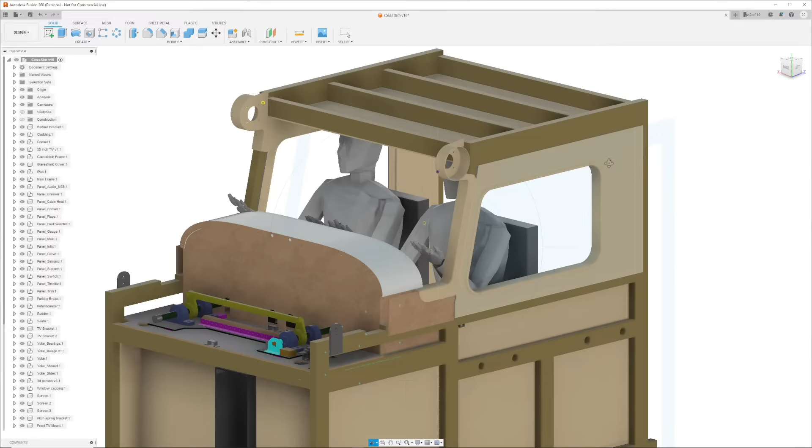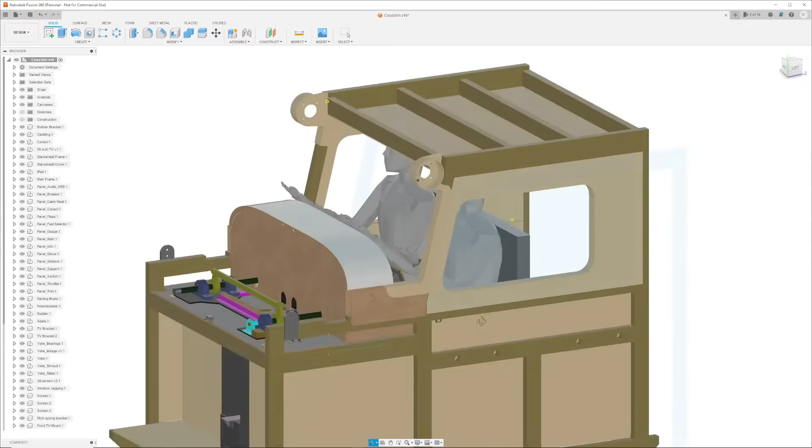I think firstly what we'll do is strip off all the other bits of the model, and I'll come back to you in a moment once I've stripped this all down. You can see that's the completed side there; we'll work on this side over here. Let me just strip everything off and come back to you.

Okay, here we are now with everything stripped off, and I've just got the two MDF sandwich panels, if you like, which would straddle the timber frame, and we need to create a capping material, or a cap, that follows that profile all the way around.

So part two of this is to draw a section of what that capping is going to look like. You can be as creative as you like with this. To do that, I need to create a sketch plane, and I like to create one that, if I took a right view, kind of cuts through there, because it's on the horizontal. It doesn't really matter where it is, as long as it's on the horizontal.

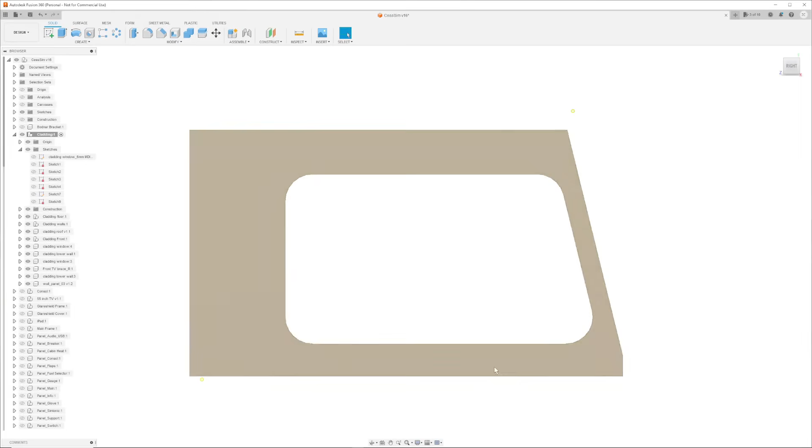So we'll scroll ourselves back, and the way I'll create a sketch plane through there is I'll take an offset from this back one, from here or here — it doesn't really matter — but I'll take an offset plane all the way through, and you'll see what that looks like. Let's do that now.

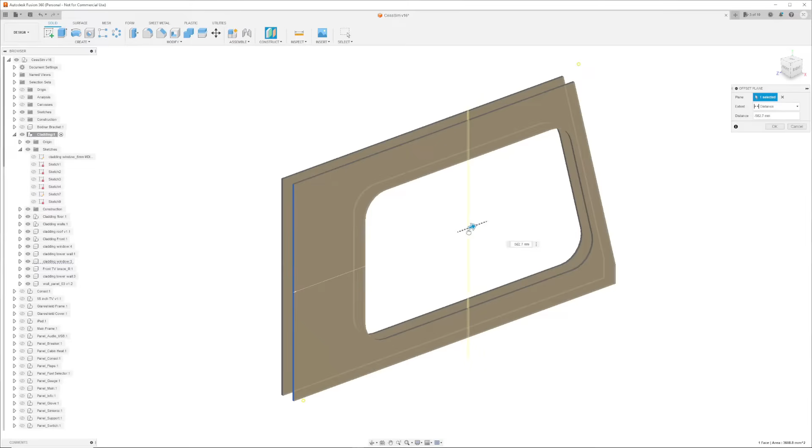I'm going to construct an offset plane. I'm going to pick the plane I want to offset, which is this one, and offset it in that direction. You can see where it's intersecting there — it doesn't really matter where it is, as long as it's somewhere in the middle there or wherever — and we'll OK that. And there it is.

That's the plane, and that's the plane we're going to create our sketch from. Now we go up to here, create a sketch, pick that plane, and it's now oriented around. It looks a bit confusing because it's literally just taken that, but one of the benefits of Fusion is you can actually slice through exactly where we were.

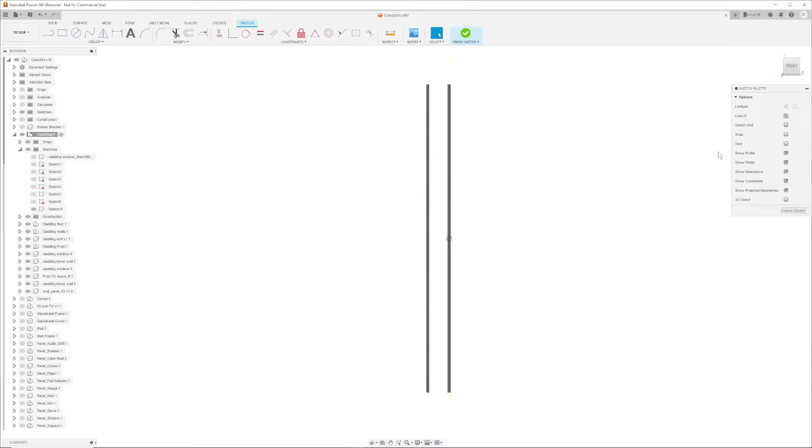If you see this on the sketch palette, see slice — click that. Now you can see the section. It's taken a sectional view through where we just sliced, and we want to create our cap on this bottom piece. So let's zoom in on this now, and let's start sketching.

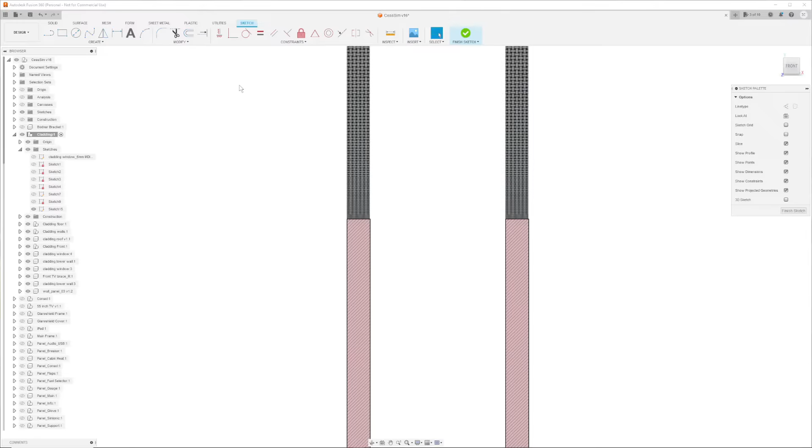You can be pretty crude with the sketch — you don't have to be dimensionally correct because you're going to do that next. Let's just knock up a very rough little sketch here, and we'll go up, across, down. This is all Fusion stuff, if you like; you can be as creative as you want. I'm just going to do that. Okay, you get the idea.

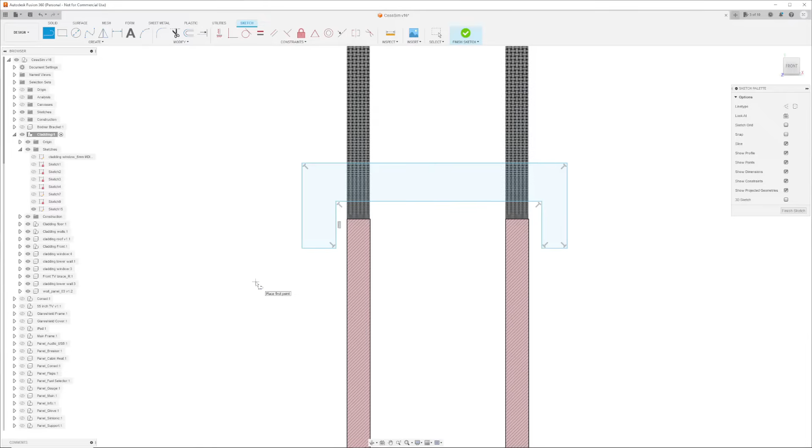Now that's the rough shape, but now we need to make that look dimensionally correct. So we've done our rough shape; let's give this some dimensions.

Firstly, let's get a dimension to make sure that this inside edge of this thing is sitting off of the bottom. From memory I had this at about a 0.5 millimeter clearance here, 0.5 millimeter clearance here, and a 0.5 millimeter here. Play with that yourself, but that's what worked for me from memory.

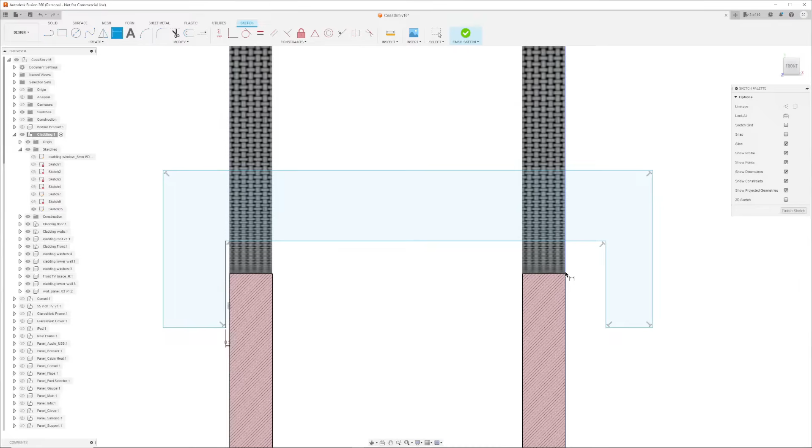So I'm going to make sure that between there and there is 0.5, which is what it is. It does that automatic zoom, so just zoom back in again, okay? And do the same thing over here — I want to go from here to here, and that needs to be 0.5, okay?

And then I also want to make sure from here to here is 0.5, and from here to here is also 0.5. You can see that's done, so that's beautiful.

Now we want to give this some thickness, so let's make this 3mm thick. So here we want that to be 3mm. Do the same over here, make that 3mm, and we want this also to be 3mm. So we go from here to here, that's 3mm. Okay, and there's a 3mm thick cap.

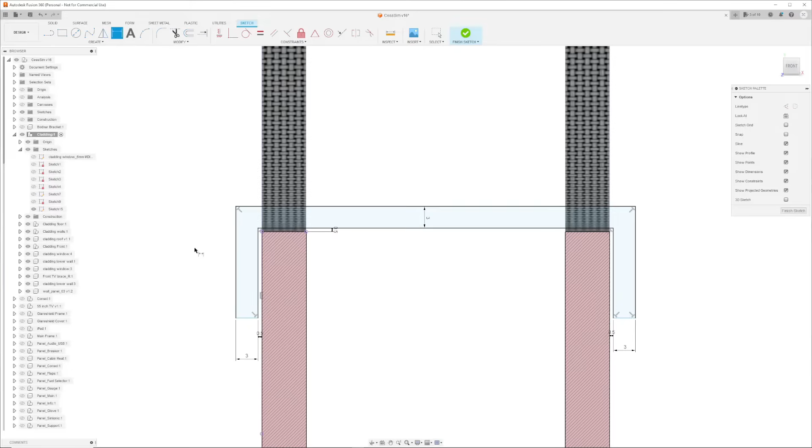Now, what distance does that want to look like? Again, this is up to you to look at yourself in terms of your own profile. But for the sake of this exercise, let's have a look. It's currently 15.4, I'll make it 15. Enter that there, and we'll do the same over here just to make sure that is exactly 15, and it is. So now that's it.

So there's our sketch done. Now we need to look at moving on to the next part, which is to profile that so it actually follows the inside profile, if you like, of our cutout. Let's go there now, and I'll show you how to do that.

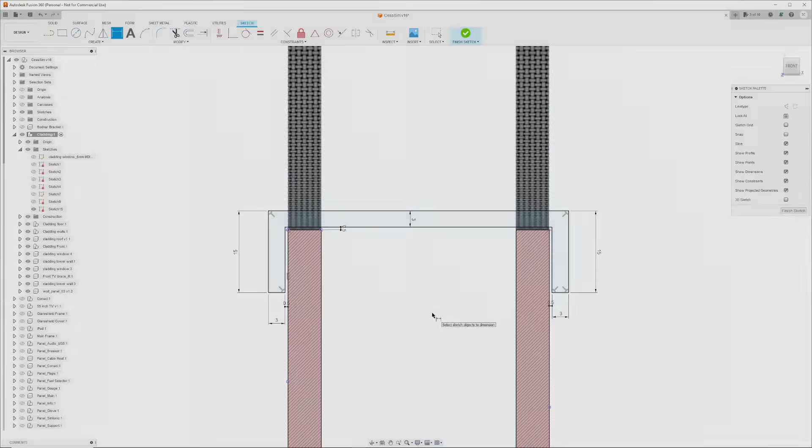Fusion 360, when you get the hang of it, is a really powerful program. I'm no way, shape an expert here, but once you get into it, it is really, really good. So, here's an example of why.

What I want to do now is automatically get that shape traced around the inside of this, and I already know this is the profile I want. I want this line all the way around here. But watch what we can do here.

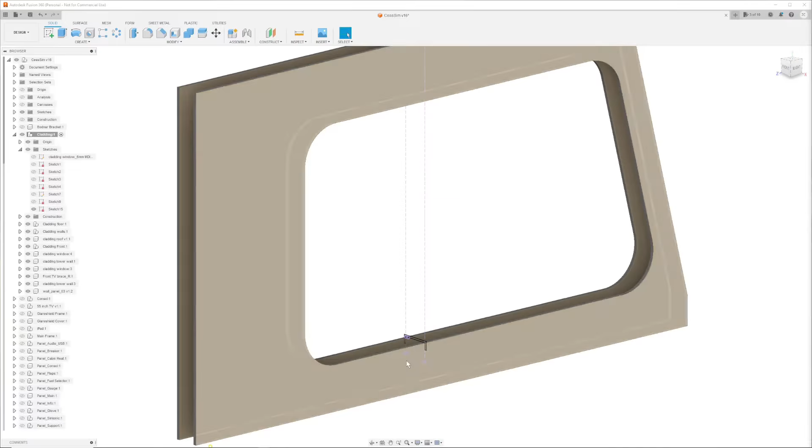So now that we've done that together, all we need to do is highlight our sketch. By basically hovering your cursor inside of it, you can see that. We click that with the left button. We come up to create, and we're going to go and see the sweep.

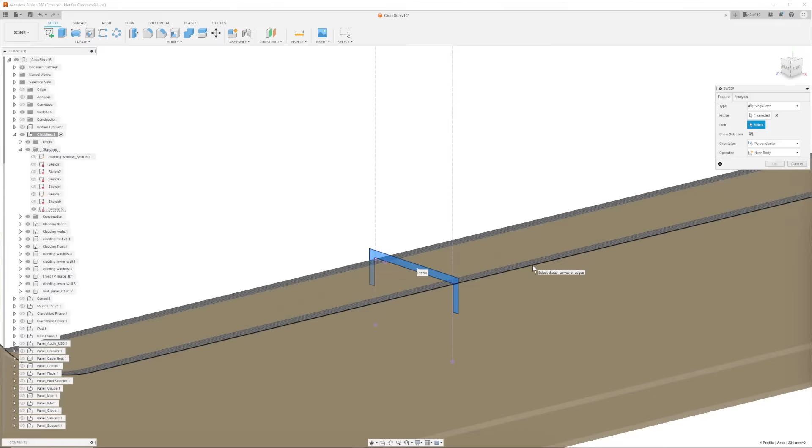What we're going to do is select a path here. That path is going to be the outside line. See that there? As soon as I do that, we make sure before we do that we create a new body, which is what that is, okay? And it's going to be perpendicular. Let's leave that where it is. Go to here, click that, and then OK, bang.

Done. It's as simple as that. There it is, done.

Well, we say that, but there is, now that we've got that, and by the way, bear with me, this is a different material here. Obviously you can change that material, but just to show indicatively what that's going to look like. But now you've got it. So that's your capping done.

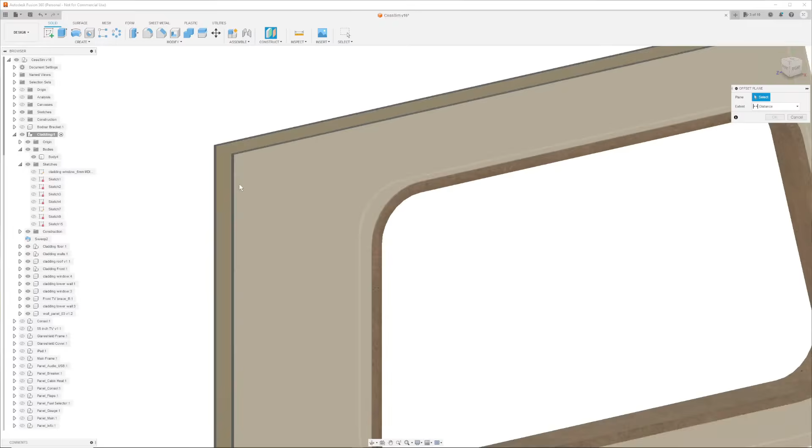And if I was to go and create a new sketch, you would see even at the top there, that should be that dimension in. So let's have a look at that. Let me just create a new offset plane just to see what that's going to look like. I'll come in from here, and I'll come across, let's go over to the edge towards that edge over there, and we'll OK that. And I'll just create a new sketch here just for the sake of this exercise.

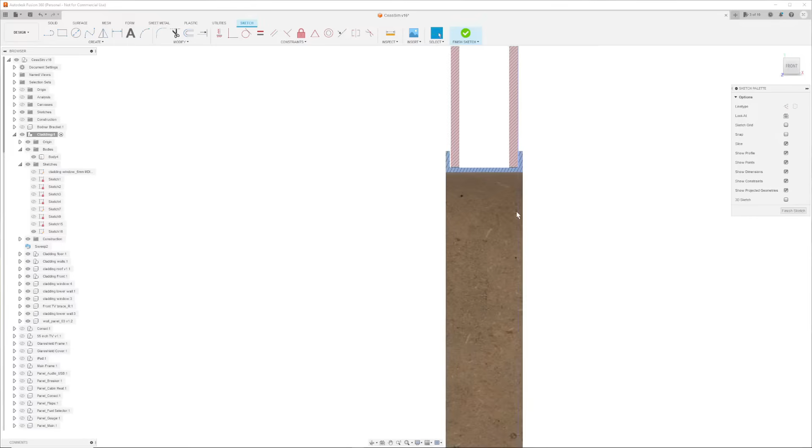I'm going to come in on that, and now I'm going to just hit slice, and there you see it. There it is. See? That's the cap at the top. As you can see, it's got half a mil there, and half a mil here, and no different at the bottom. So it's worked out perfectly. Okay? And we can delete that sketch, we don't need that one.

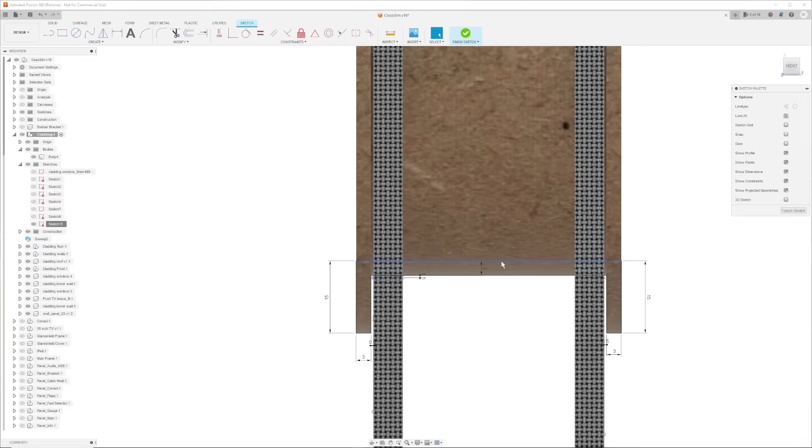So now we've got our profiled capping done. And you can pick whichever profile you like, you don't necessarily have to do a basic profile like that. If we go back to our original sketch that we had and edit that again, you could have this be a fancy little insert shape up here or whatever you like. You can do whatever you like with that, but I just made it a straightforward cap.

But it lacks a bit of detail, and before we move to the last bit, which is cutting all this up, we probably need to give this a bit of finessing, because it's got sharp corners at the moment. It's a purely sharp cornered piece. As you can see, these are all sharp edges. So let's get some filleting into this and do that now.

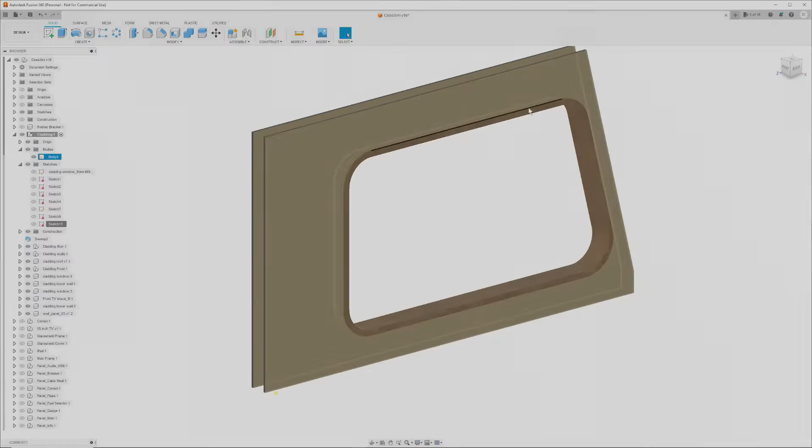Okay, just before we start the filleting, I thought I'd just change the appearance colour of that, just so it makes it look a little bit more presentable, so you can see what's going to happen here on the filleting side. So I've just changed the appearance colour of that in Fusion, which was fairly straightforward.

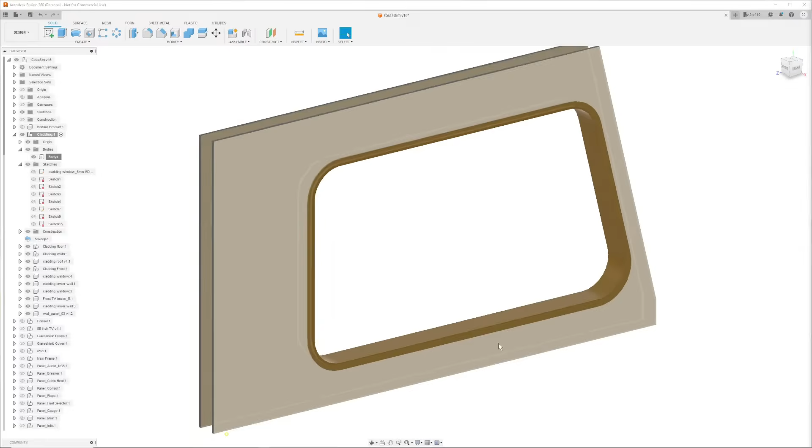So let's now dress these up to make them nicely profiled in. The first thing we're going to do is create a fillet on each of these two top edges. Simply go up to your modify tool, fillet, and pick that edge. As you drag that arrow in, you can see what's happening visually to the model, and it's up to you how big you want that to be. I'll go for a 2mm fillet on that one.

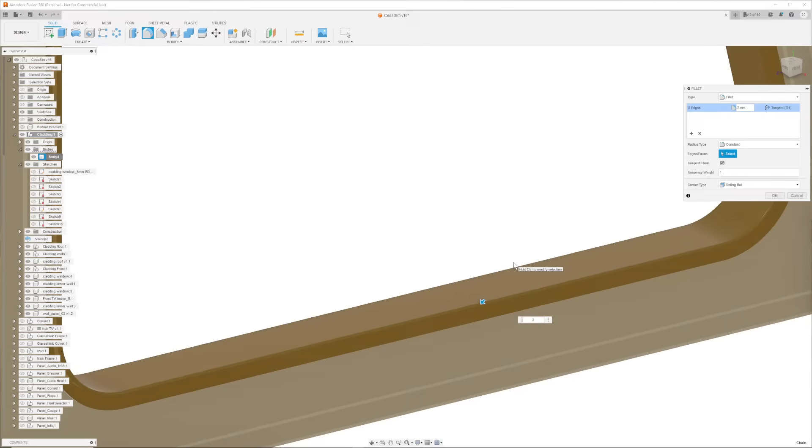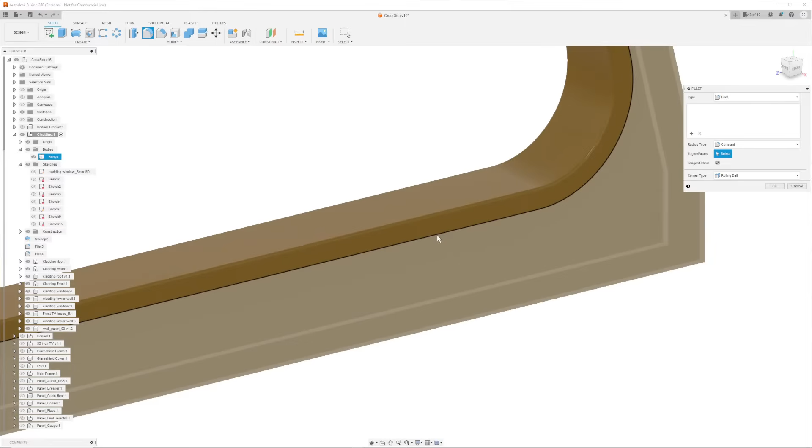Okay, and you can do whatever fillet size you like. Do the same thing on the other one - take that edge there and we'll make that a 2mm fillet as well. So that's the two edges there which you can see. Let's do another one on the bottom here as well, a 2mm fillet, just to round the edge up from the bottom. So 3 fillets now been created.

So we've now got some roundness to this. I'll just check that to see if it does look like that. So again, I wouldn't mind just doing a section profile through here.

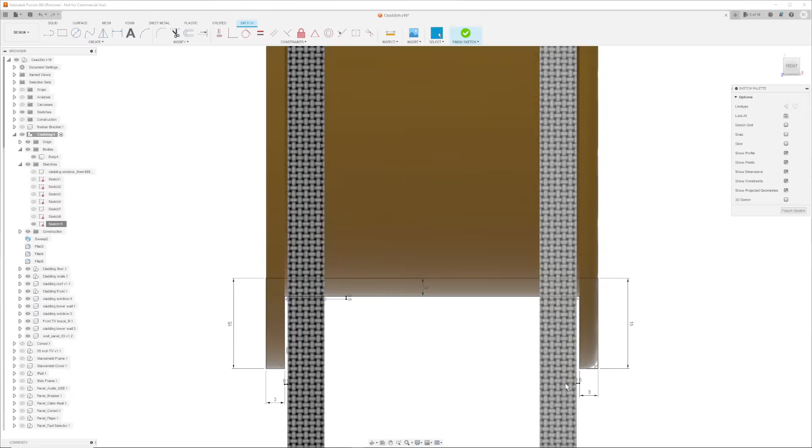I should be able to do that by picking up the previous sketch. And as you can see, what it's done is it seems to have picked up this, but I don't think it's picked up the rest of it. So let's just see what's happened here. Make sure that we've got everything, and I'm not sure we have. So it looks as though we may not have all of it. Let's just check to see if we have. You've got to do some checking on this.

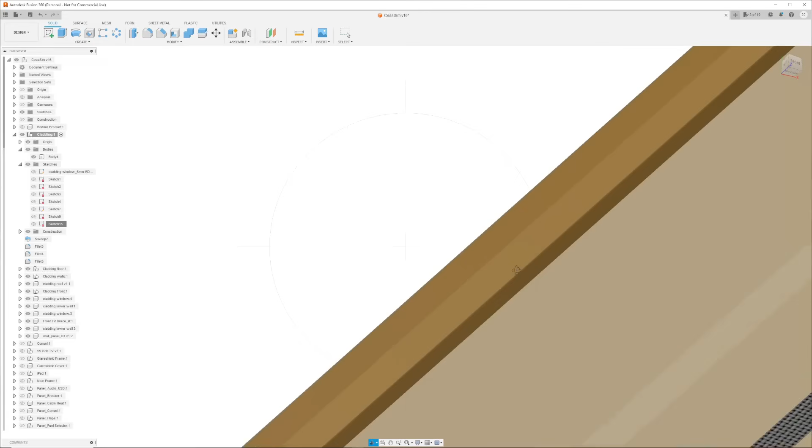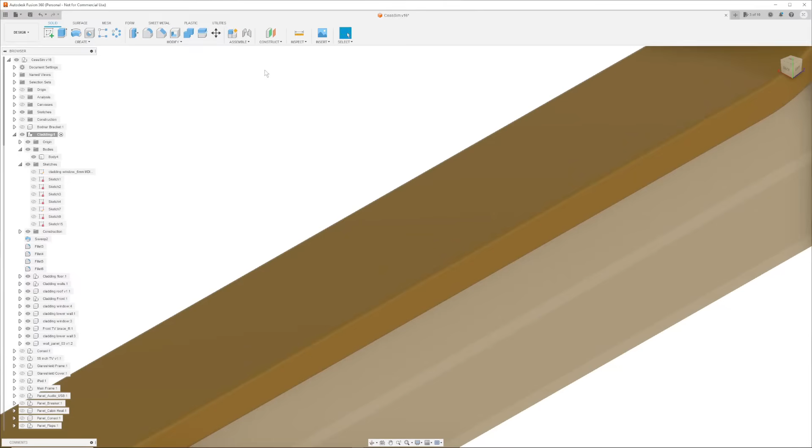I'm not sure we've got that, so let's just make sure we fillet that all as well, making sure we've got 2mm there. Now we've got that, and we've certainly got that one because I can see it going all the way around. Yep, and make sure we've got a 2mm fillet on the top here. Fillet that one. I think we've got that.

Yep, I think we've got it. So I'm pretty sure that's it. That looks like that's filleted all around there. So I think we've got that one. Okay, so we've done our filleting.

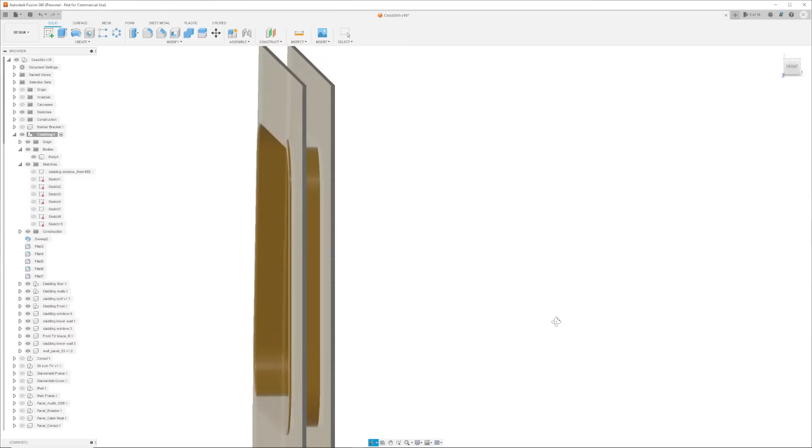Now we need to be able to do some slicing of this thing so that we can cut this up into pieces, which is the next phase - cutting this into logical pieces that you'll be able to print on your printer and then join them together. So let's go to the final part of this, which is to now slice this thing up into usable sections and go from there. Let's go there now.

Okay, splitting this body up - effectively this is one body at the moment, so obviously we need to get this into parts that we can print from. That's up to yourself how you want to do that, but the way that I did it is I did each corner area as individual pieces, and then just broke these pieces up as you need them. So to do that, the way I've done it is I need to split this, and that's that split function there, split body.

So to do that, what I have done is I've created new sketch planes and used those sketch planes to split the body. So let me show you what I mean, and I'll focus in on the corners first because that's what I want to do. So I'm going to create a few sketch planes here, and we'll go from there. That's our capping sketch plane. So I'm going to create a few more offset sketch planes and we'll split this body up.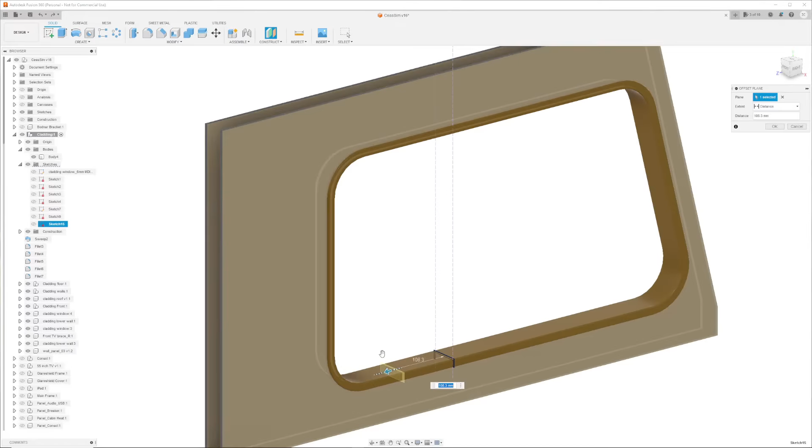So let's go to the first one and construct an offset plane from here, and we'll come in and probably place this. I want to do it on the corner, so I don't want it to be on the bevel - I want it to come out a bit, so it's actually on the straight. So I'll do it about there, and that'll be the same as up there, so that's fine. So I can rotate that one, and that'll be fine for that vertical cut. We'll OK that, and then I'll do another one which will be on the other side.

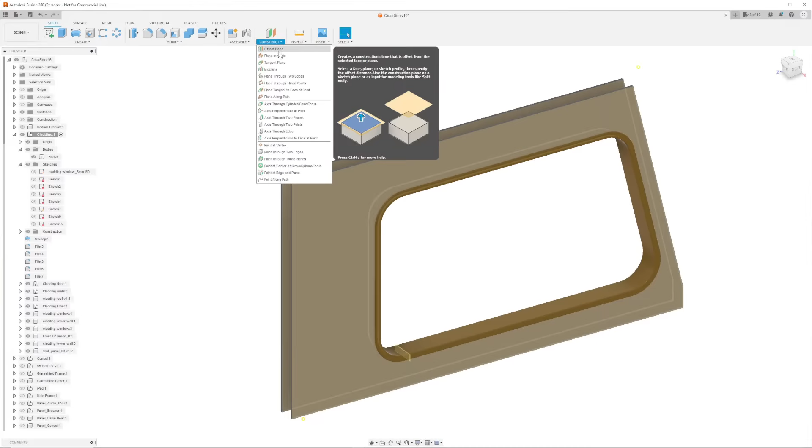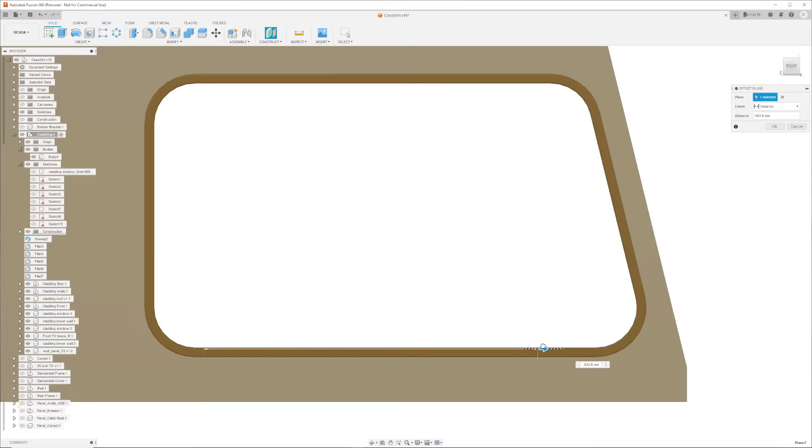So construct another offset plane - can probably come from this one actually, and we'll go over there. And let's just go to the right hand side now, and I'll pick another one, which I've just got to be mindful about that top bit there, because if I come into here that's going to intersect that. I also want to keep them the same. So I'll do one about here, which roughly looks about right. Okay, that one.

So that's the two verticals done, but now I need to go this way so I can cut this side of the corner. Same philosophy, just take it from this plane though. Construct an offset plane, come down from here, come down this way, and let me just get that dimension like that, and we'll take that down.

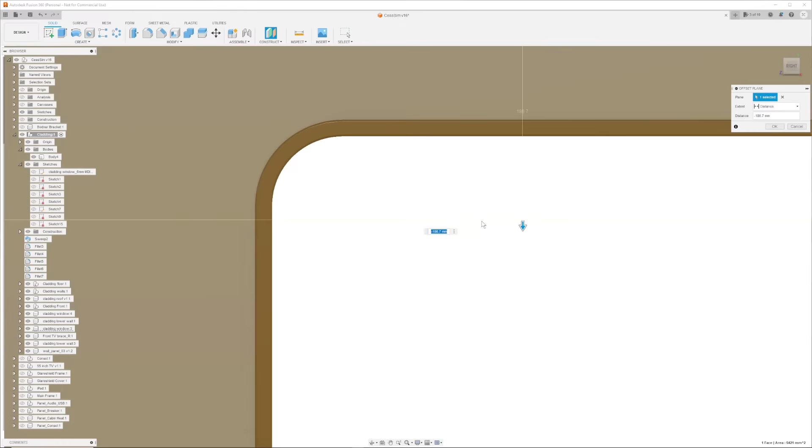See how we're going to go past the curve? So come past the curve, about there will do. Okay, that one. And we need to do one more down the bottom here. So we'll go and construct another offset plane. We'll take that one there, and we'll come down again, and we'll come above the curve. Doesn't have to be too scientific with it, and that looks like that fits there.

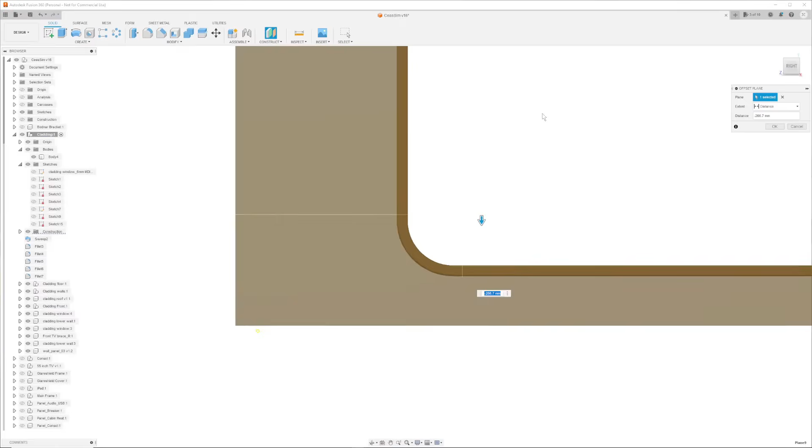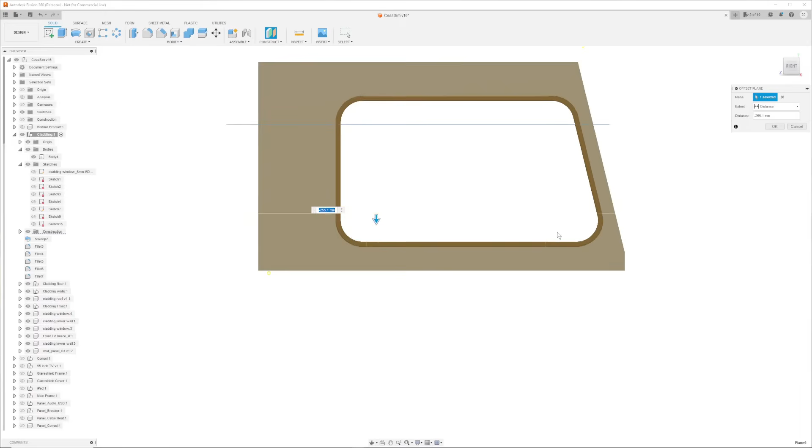See how it's picking this curve up? I need to go up a bit because it's still on the curvature there. So I'm going to pick that one up a bit there, and make sure that I'm not on the curve, which I'm not. I can probably come down a fraction, probably to there. That's pretty close. Okay, and okay that.

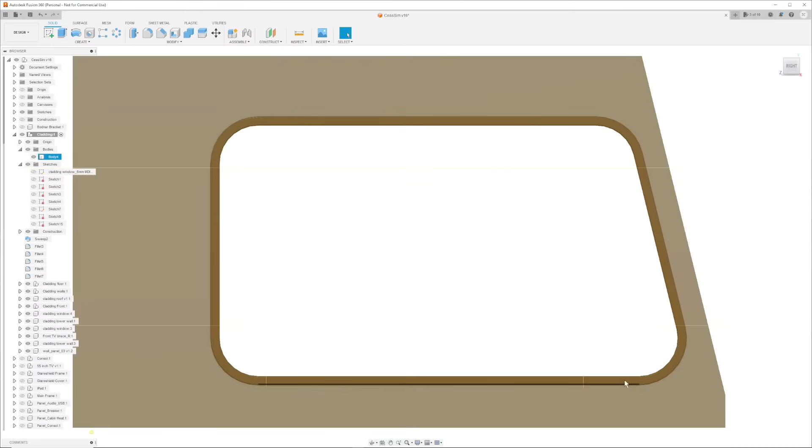So now you can, it's very hard to see, sorry I've got this on the yellow, but you can see I've got a sketch, you can see how I've got a cut line there, and a cut line there, and a cut line there, and a cut line there. I could probably do another cut line on this one if I wanted to, and I might just have a look at that in a moment.

So now that I've got those cut lines in, we're going to start to slice this thing up and split the body. We're going to split this up into bits. What I want to do is isolate the corners from the straights. Okay, so let's do that now.

Okay, let's start splitting this body up into its pieces. I think we could probably just hide this MDF for this, so we don't need to see this. So let's just find where the MDF is, and let's just hide this. I think it's in here by the look of it.

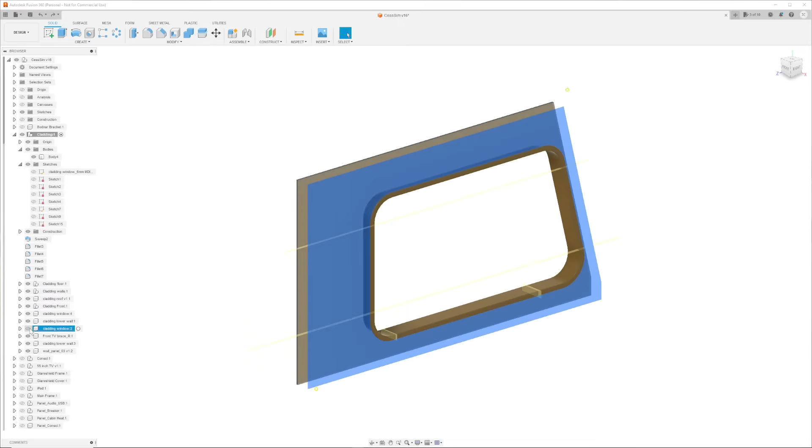Looks like it's there. Cladding, window, there it is there. So we'll just turn that one off and turn that one off. Okay, so now we've got that, and we've got our sketch cut points there. You can see the beautiful piece of single capping.

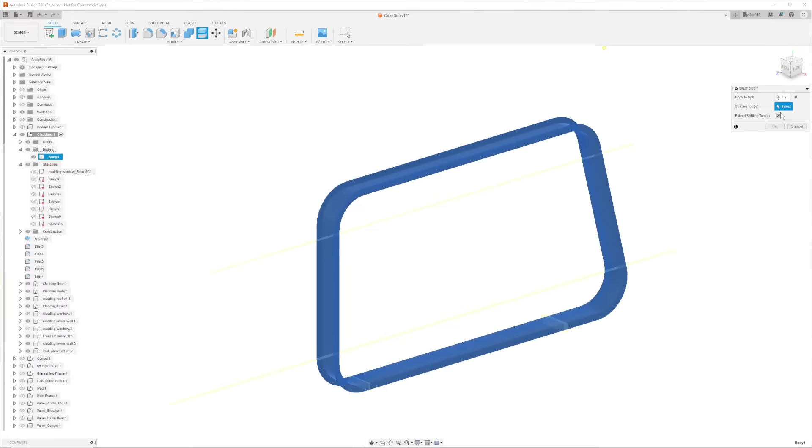So let's split this up now. Split the body. We're going to take that, we're going to pick the body, and at the moment it's obviously in just one body, as you can see. We're going to take that, and where do we want to split it? The splitting tools. We'll go through the horizontal ones first. So we'll split it there and there, and just okay that.

Now if you have a look over here, and if you highlight it, it's cut it. See what we've got? Body number 4 is now this bottom piece, one piece. Body number 5 is the top piece. Body number 6 is the side and the side, because we've actually just taken a slice through there and through there. But what we do need to do now is, this is still, that's not too bad, but that is one piece.

So we need to do our vertical cuts. Let's do the same exercise, but this time doing the vertical cuts. Okay, so again, let's go to split body and see if we can do the vertical cuts. Pick our body, which is there, and pick our cutting tool, and that doesn't seem to work.

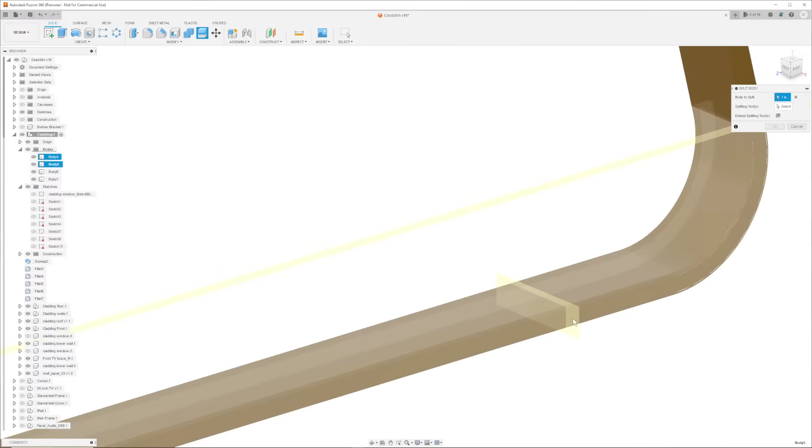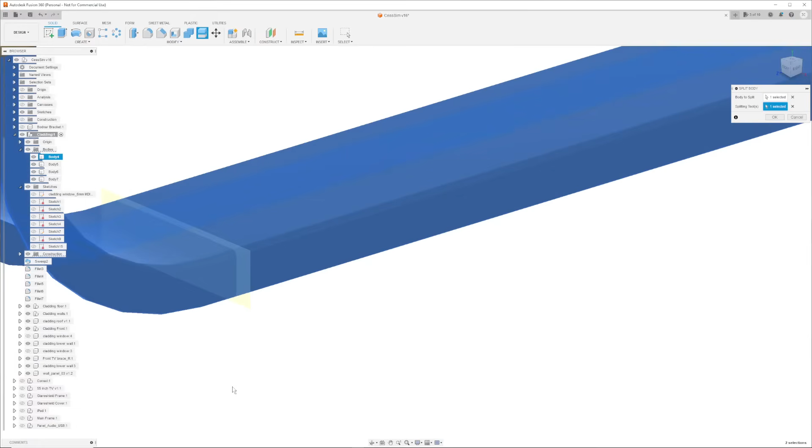So we may be able to cut the bottom one, but for some reason we may need to do another sketch plane for the top one. But let's just see how we go. So let's try the bottom one first, because that seems to go through there. So we'll see if that works. Split that. We're going to slice that, pick our splitting tool, which is going to be here and here, and okay.

Now that should have done that. There it is there. We've got the straight bit, we've got that corner, and I think we've also got, we don't have that corner over there.

There it is. That's okay, that's good. Now we've still got that top bit there though. Let's see if we can split that up at the top. Just try that again, and we'll go back to our split body - that's the body we wanted. Let's pick our splitting tools. Oh, it does work - sorry, I must have had the wrong one before.

And see, it hasn't worked. So we've got to pick the body and we're going to split that. There we go, that's better.

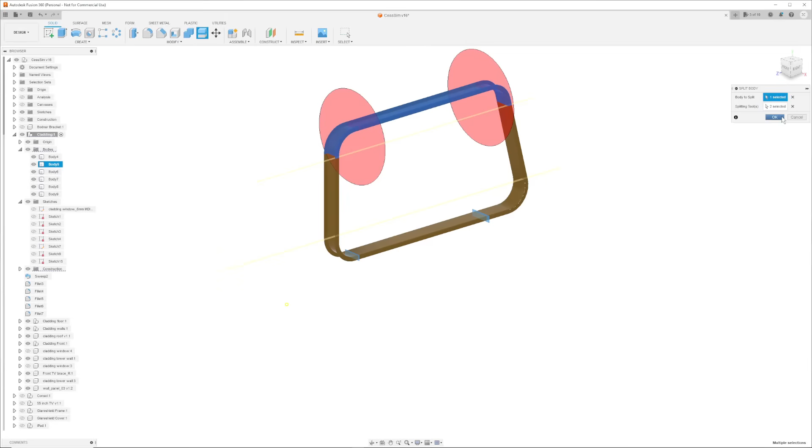Okay, now it's done it. Now if you have a look at all the bodies coming up: body number 4, you can see it's got that corner there. Body number 5's got that corner there. 6 is a straight, 7 is a straight, 8 is a straight, 9 is a corner, 10 is a straight, and 11 is that corner. So we've got the whole thing now split around.

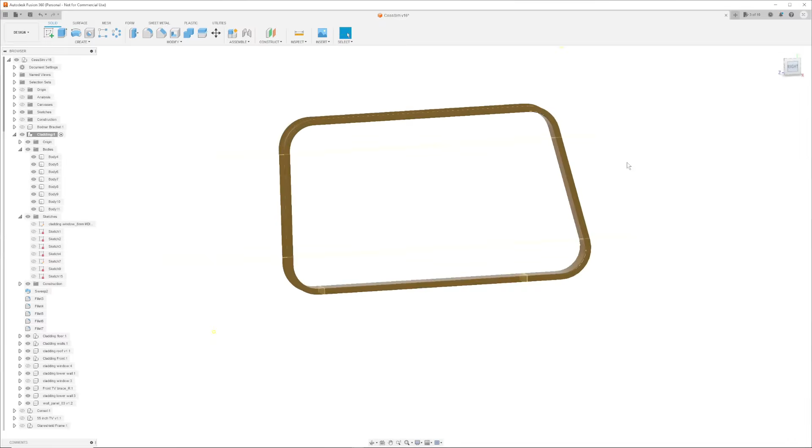But it's still not quite finished. I think what we can do now - well, practically, you know, these are perfect fits, and we know full well that won't be a perfect fit when you go to fit this thing up. You really need to introduce some gaps between each of these, and given your 3D printer's tolerances, I'd probably work on say half a mil gaps between each of those pieces to make sure it fits.

And that's just a simple case of taking the piece and extruding it back a little bit - a press pull back by half a mil - and seeing what that looks like. So let's go try that now.

Okay, so to do those pieces where you want to come back, it really doesn't matter where you start, but I typically would just focus on the straight pieces and pull those back rather than working on the corner pieces. You can do the corner pieces too, but if you keep the profile going, just leave it where it is. So I'd just focus on the straight pieces.

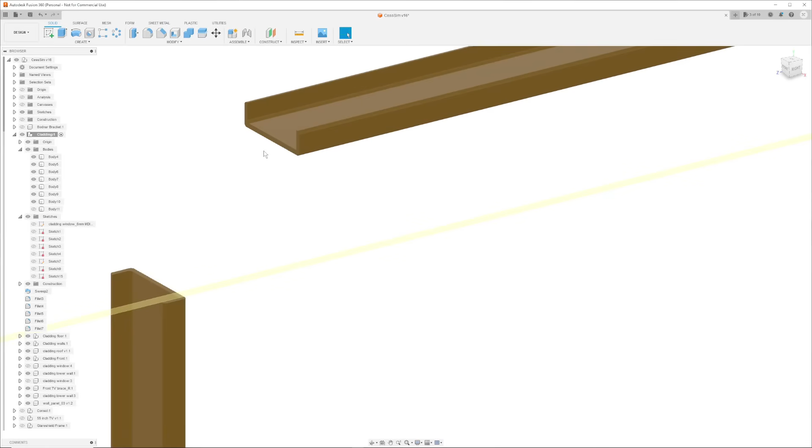So what I want to do is highlight one, and turn this one off just temporarily to highlight that. You can see now I've got this face exposed, which is beautiful, and it's a straight piece. So all I need to do is scroll into here, click on that edge, right click, press pull, and bring it back minus 0.5.

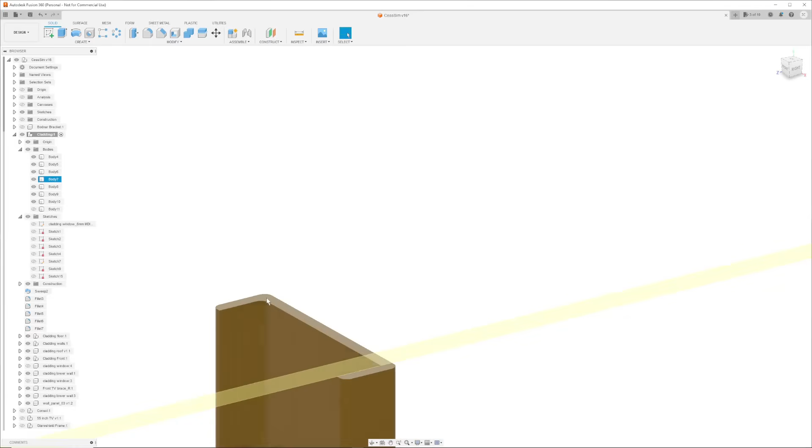Okay, and do the same thing with that one - highlight it, right click, press pull, and bring it down minus 0.5. And then okay that. Now if you turn back on that body, you'll see that you've now introduced a small little gap there - you see that? You've got that very small gap.

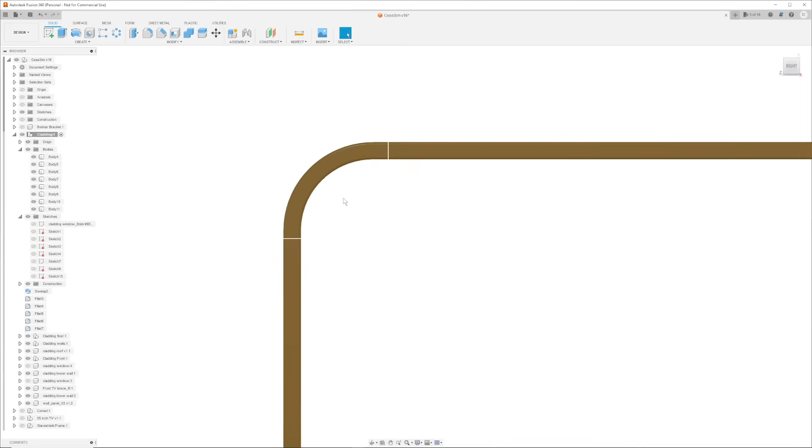Now you might try 0.25 - I can't remember exactly what mine was, but it is useful to have a gap there. So you need to take that, do that process, and follow it all the way around all of them. Do the same thing around all of them.

And the way that you'll do it, I'll show you once again. We'll take this one over here. If we hover over it, we know that that is body number 4. So let's turn off body number 4, visible there.

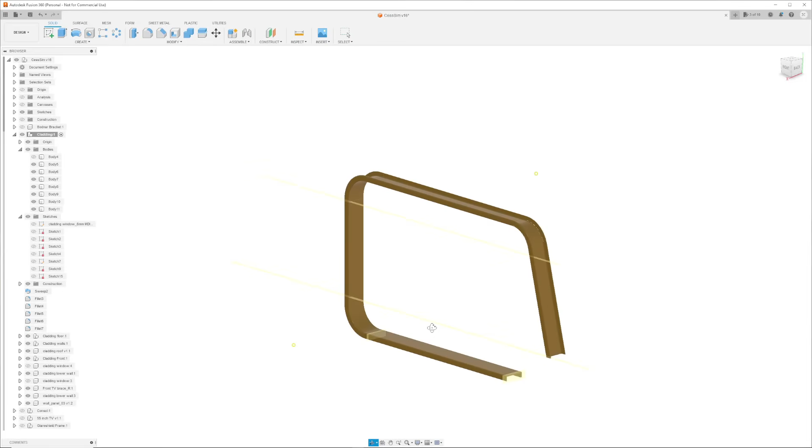Okay, and all we need to do now is come into the straight piece here, and we're going to press pull that back. We could probably turn this off, and we'll save that there, and press pull it back. So we'll highlight the face, right click, press pull, come back that way, minus 0.5.

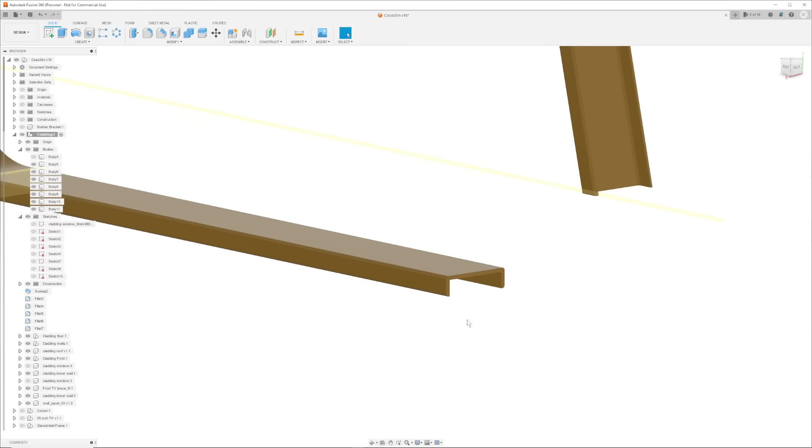Okay, and then do the same on this one up here. Scroll that up like that, and then take that face and press pull - you want to come up, move away from yourself, minus 0.5. The minus being it's cutting back into itself, and okay that.

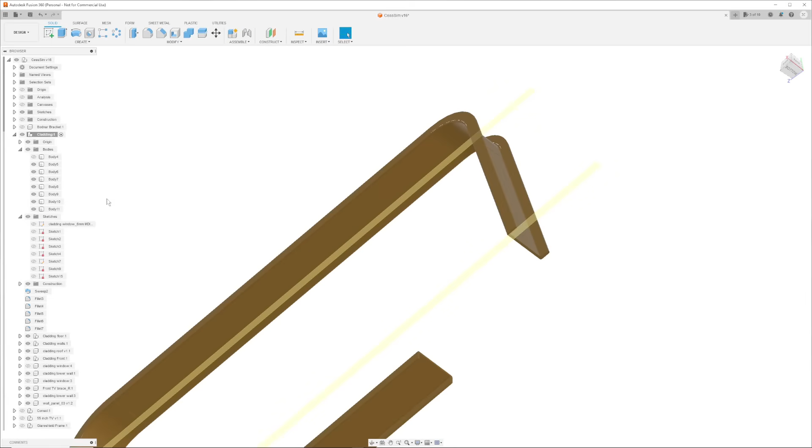Now if we go back over to where the bodies were, highlight body number 4 and turn it back on, you can see that now has a half mil clearance. Okay, so that's how you'll do that - do that for all of them. I'll do that now, and then I'll come back to you and we'll finish off showing how it looks.

Okay, so I've now created those little gaps at each of the corner points, as you can see there on the left, and as you can see all the way around. So from a 3D printing point of view, these would now basically be full bodies.

There's body number 11, let me just orbit that to show you. Number 11 on mine, yours could be any other number, or number 9, and so on. So they will all work.

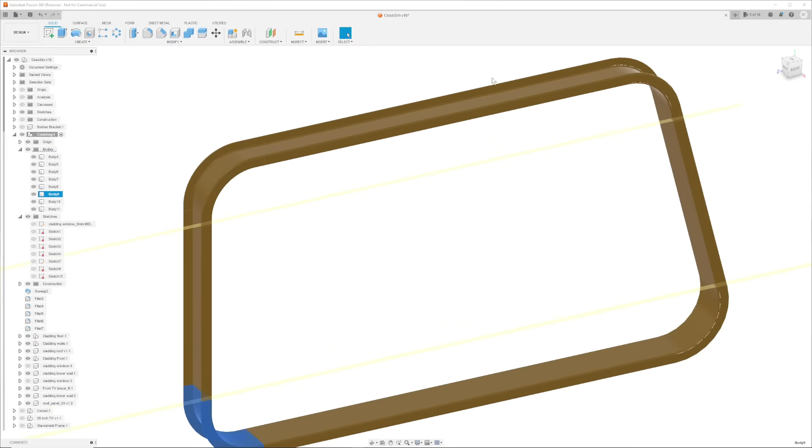But the bits that still require a bit more work - we could still further split these long straights, because at the moment that's going to be way too big as a single piece. So you need to split that up as well. You'll do it the same way as before, and it's entirely up to you depending on how long your bed is, and how you want to slice it.

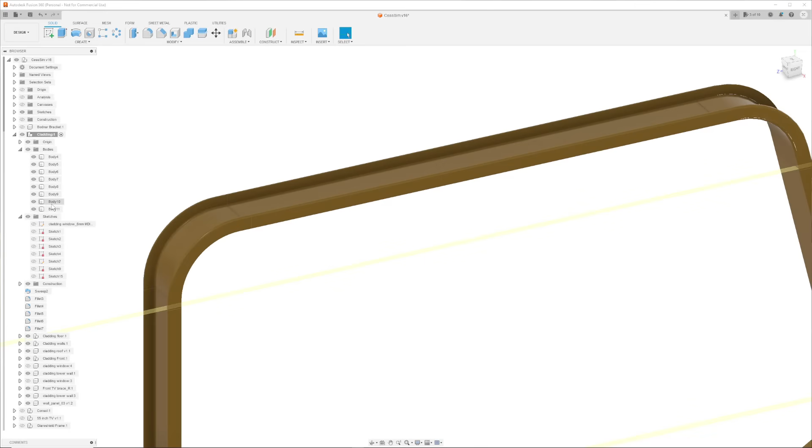I'm not going to go into each and every one of these, but let's have a look. My longest one is probably this one here, let's see how long that is from dimension to dimension. I'll turn these other two off so we get what that looks like. So this end to end is 502 millimeters long, okay, and that is way too long.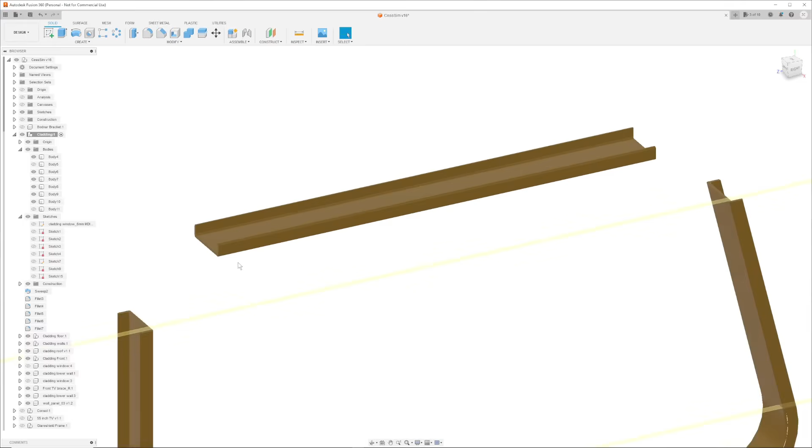So I need to split that down. Now that you've got that, I can create new split points and split that body down. To do that I can literally split that body, and we do that by basically creating our offset planes, once again just cutting through that.

So you will pick yourself how many planes you want to put through that. But let's say I want to make this into 3 pieces, or close enough. What did I have? I had 502, so we'll do 2 at say 150, and the last one at 300 - so 3 at 150, and then maybe 1 at 60. But you can do whatever you like.

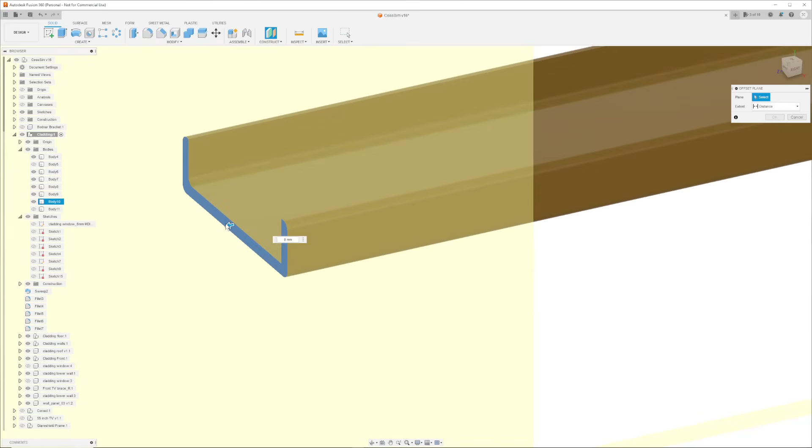So I'm going to construct an offset plane through here, come in that way, and go in at say 150. Whoops, minus 150, my mistake, other way. And okay that, now I can split that one up.

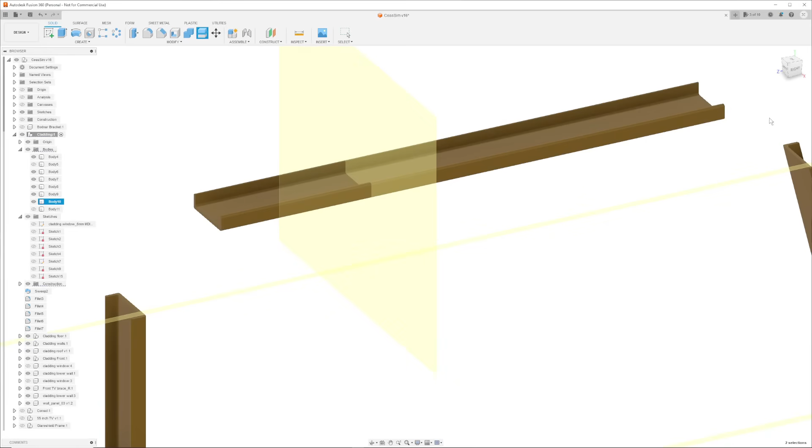Same thing again - you go into your split body, take the body, and take your splitting tool, which is the plane you just created, hit that, and go OK. Then you can hide that plane using show/hide, and now you've got a split there and there.

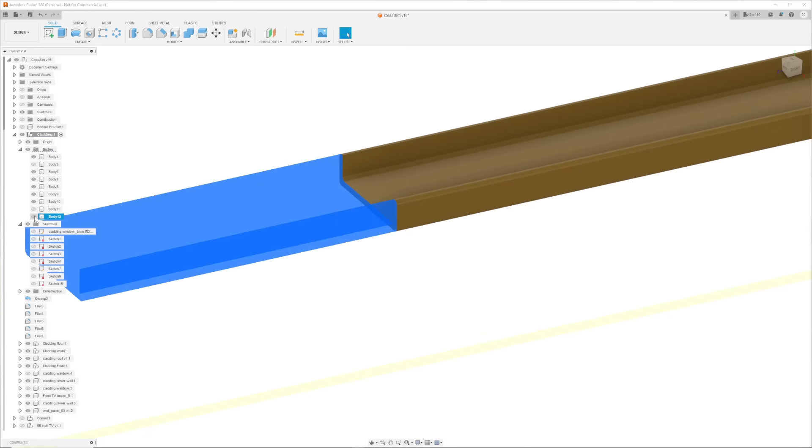Number 10 is that one, number 12 is that one. But remember, that is joined, so one of these should come back 0.5 millimeter to give you that clearance. So if I turn off this one, and then take this one, press pull, bring it back minus 0.5.

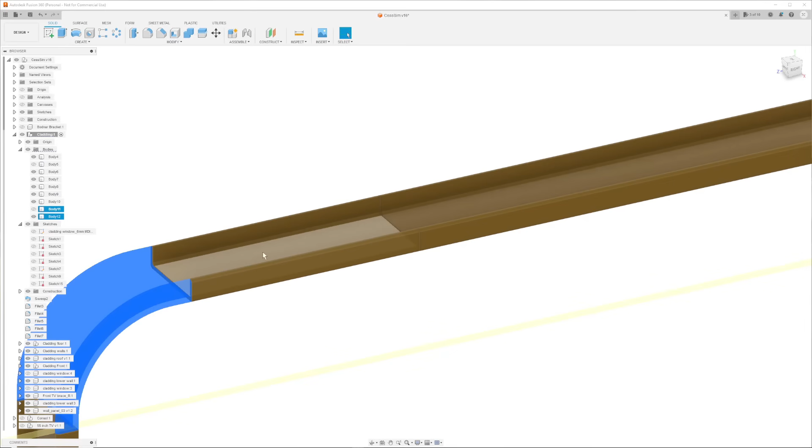Okay, turn it back on again, and now you've got that little bit of clearance between the two. You can see we've created a more manageable piece. You really need to do that, working your way around the entire capping frame. Once you've done that, you'll end up with a whole series of sections separated by circa 0.5 millimeter, if that's what you want as your clearance, and you're done.

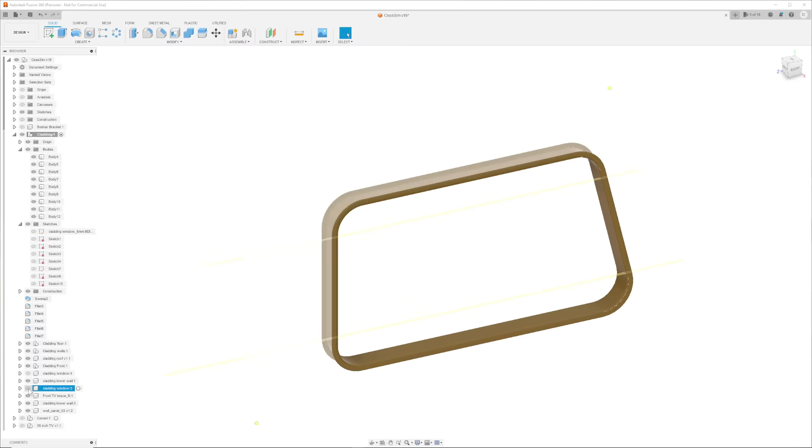Turn everything back on, let's turn the cladding back on now, and we're just about done. There's our cladding for our windows. I'll turn off these pieces here, hide that, and hide that, and there it is.

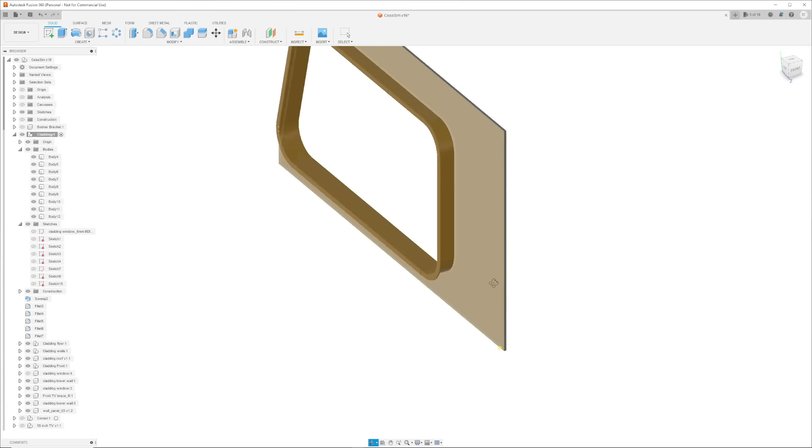So again, I haven't quite finished it off all around - oops, sorry, I've still got the other window to put on. Need to put the other one back on. There it is. Okay. And there it is - that is how you do the capping material for the side windows.

I hope that was of use. Again, I apologise for my Fusion 360 instructions - not necessarily meant to be a Fusion 360 piece, but you get the idea.